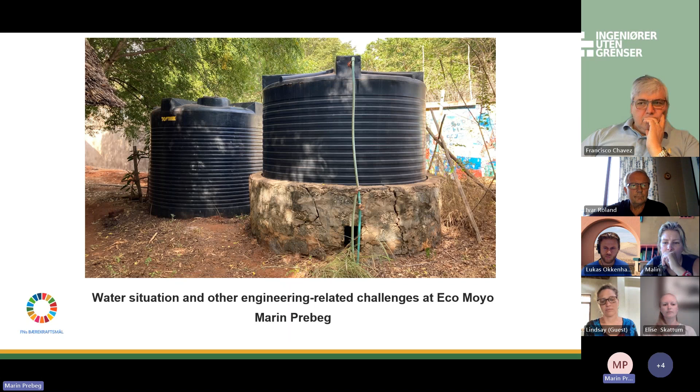Thank you, and thank you for joining the presentation on the water situation and other engineering-related challenges at Eco Moyo. For those who have not met me, my name is Marin Prebeg, and I have been involved with Engineers Without Borders for about 2 years now. The latest thing I did with Engineers Without Borders was a visit to Kenya in February this year, where I did the work I'm going to present now. The brief presentation will revolve around some background about what was done and where, since some people have not been at the school and are not familiar with it.

I'm mostly going to talk about the water supply network at the school. We did many other things related to water supply, such as maintenance, water filters, and water demand. We did some work related to solar panels, and had some discussions on rainwater harvesting, erosion, irrigation, and so on. But because of the length of the presentation and its scope, we will mostly focus on the water supply and leave the rest for discussion afterwards. I'm also going to say something about the engineering committee, one of the main outcomes of the visit, and we'll close with some brief conclusions.

So, brief background to start with. Where in Kenya is the school? It's close to the coast, 2 hours north of Mombasa, for those who are not familiar with it. And it looks something like this, for those who haven't been there. The school is attended by approximately 250 students every single day, who live in the area around the school. Part of the staff lives at the school quarters itself, while part of the staff comes to the school on a daily basis.

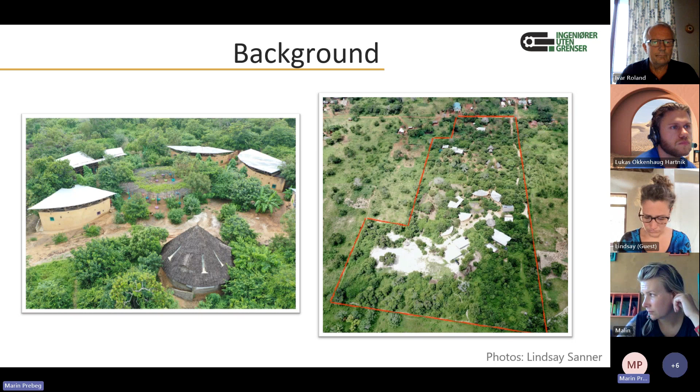The work presented here is presented in more detail in the report we have written for Engineers Without Borders, and it builds on several master's theses written about the school. That's so much for the introduction. Now we move to the water supply. If there are some questions along the way, if something is very confusing, I don't mind getting questions, but we can also take it all afterwards.

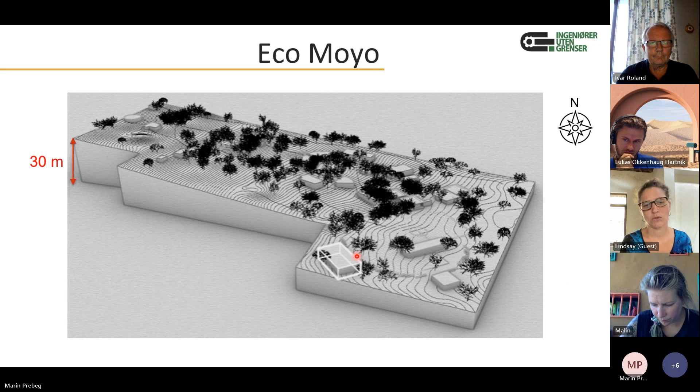That said, we actually move to the water supply network. The water supply network at the school consists of 15 tanks. 8 of those tanks are rainwater tanks, meaning they are filled only by rainwater and are not connected to the rest of the network. These 8 water tanks are approximately located at the following locations. Those familiar with the school might recognize that this is the director's house, these are classrooms, and so on. For those not familiar with it, it's not critical for the points we want to bring out. So we have 8 rainwater tanks with a storage capacity of a little over 40 cubic meters, and 2 tanks which receive municipal water with a total capacity of 20 cubic meters. This is the only water coming to the school from outside the rain falling on the property, so this is, as of now, our only connection to the municipal water system.

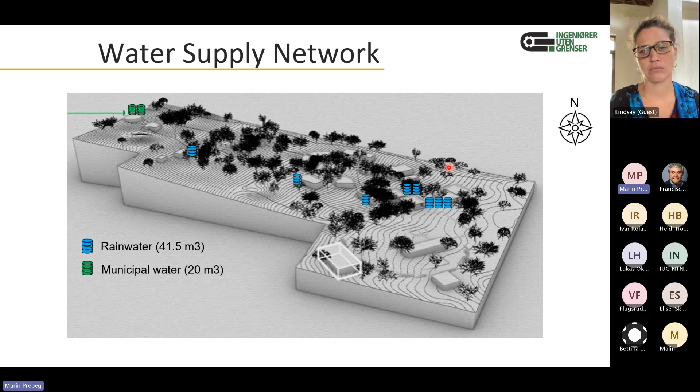In addition to this, we have 5 water tanks which are connected to these 2 municipal water supply tanks. The blue tanks are rainwater only, standalone, with their own tap, and water can be retrieved locally. We have 2 municipal tanks filled with water from the municipality. And we have 5 yellow tanks which are filled with both rainwater from the nearby buildings, and they are connected to these 2 tanks at the top with a system of pipes going around the property, which is not shown here, but you are going to have a look at it.

Let me see if I'm missing something here. Sorry for the quick delay. I don't think I'm missing anything. So that is that for now.

Another 2 figures we have just from the report: you can see the size of each individual tank on the left side, which we did not show on the presentation. And you can see a full water supply network of the school, including the taps. I have not shown water taps in the previous image, not to clutter it too much, and because it is not critical for what we would actually like to discuss here most.

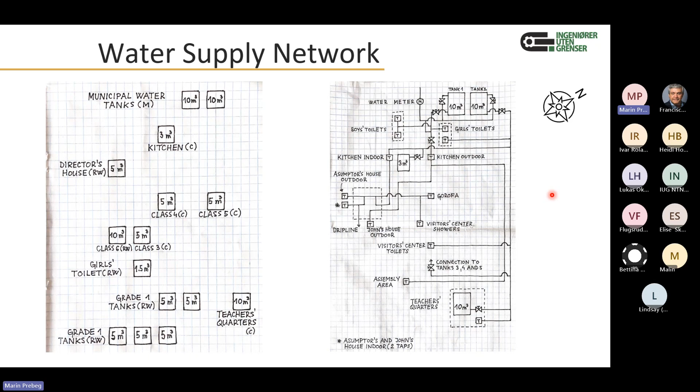What we would like to discuss are 3 to 4 main questions that were left unresolved during my stay at the school, or I did not learn the answer to those questions. I think they are all important for the future development of the water supply at the school.

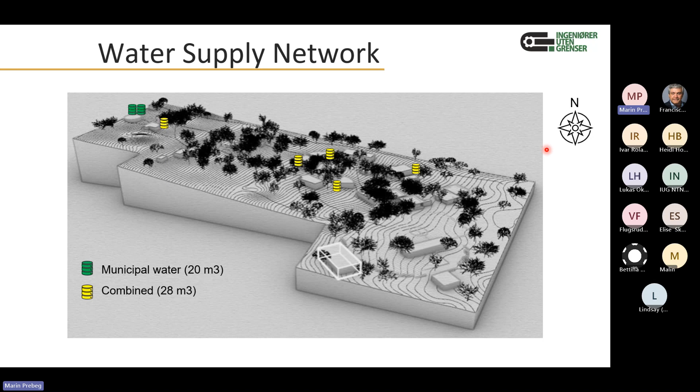So we are going to go back to this slide, and we are going to drop the rainwater tanks because they're actually not connected to the supply. We are going to focus only on the 2 tanks providing water from the municipality and the 5 tanks connected to those 2 tanks. The next thing we are going to do is use slightly different colors because these 2 water tanks at the top are each supplying their own water supply network. So in practice, it looks something like this.

The rightmost tank, which is closer to the gate for those familiar, is actually supplying with water all 5 tanks connected to the water supply network. That's the one in the kitchen, in the classroom area, and at the teacher's quarters.

The first out of 3 questions which I was not able to find out is, how does exactly the water supply network look around the classroom area? It was left a bit ambiguous in which order the tanks are filled and where exactly the pipes are going. That is something that would be useful to know.

A brief note here is that each of these tanks has a gate valve, so the water does not flow from the top tank into them immediately unless you open the gate valves. So if you open the gate valve here, the water is going to start flowing from this tank into the tank down here, so you can have access to water down here.

Which brings us to the second question. As mentioned, if you open a gate valve here, this tank is going to be emptied and the water is going to flow into this tank. If you open a gate valve here, this tank is going to get emptied and the water is going to start filling these 3 tanks. But according to some people at the school, and according to some of the discussions we had with people at the school, if you open a gate valve here, the water from the first tank is also going to flow into this tank or into this tank.

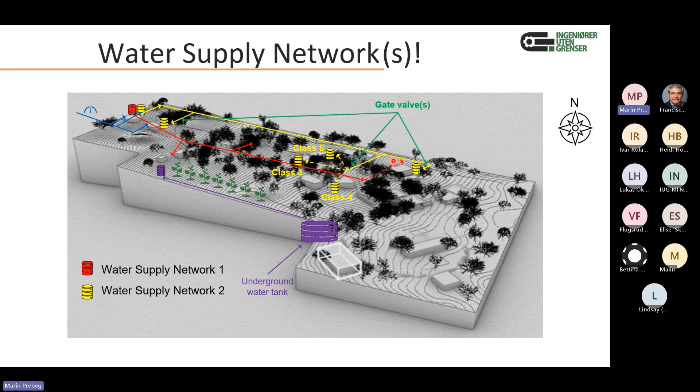So while we stayed at the school, we often felt that we lacked information about what was done, when it was done, and by whom it was done. One example is the layout of the pipes and the water supply system. The work has been done over the years and has not necessarily been recorded.

So one of the things I proposed is to establish an engineering committee, which was done. Part of it are Dominic and Gregory, who are unfortunately not here, and also Kazungu, Gardiner, and Malimu, who is the caretaker.

So the idea is to keep it as a record of what has been happening at the school, both so as not to forget it, and also if there is a change of people working and living at the school, so that you have some kind of track record of what was happening before they came to the school.

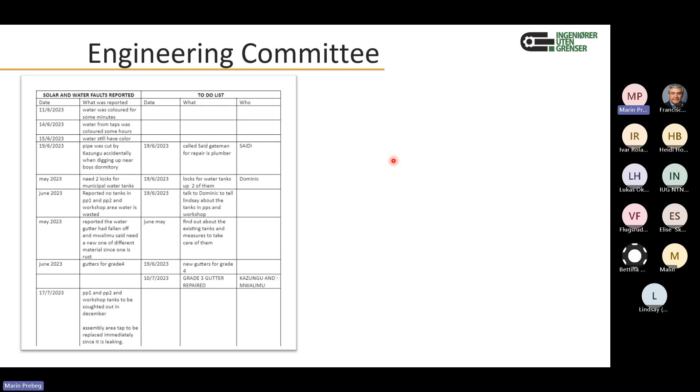And as part of that document, we are also taking measurements of the water meter on a weekly basis, in an attempt to better establish how much water is being used by the school and how much water is being delivered by the municipality.

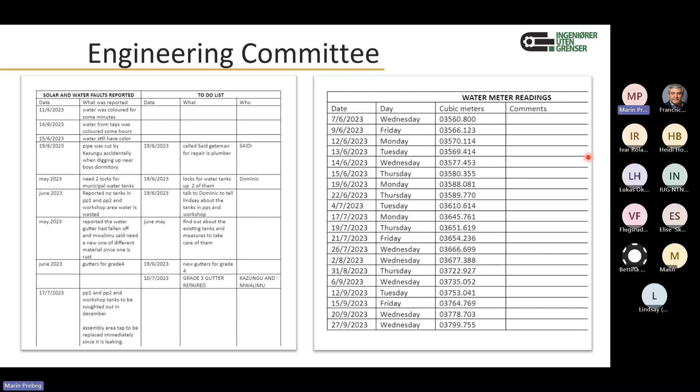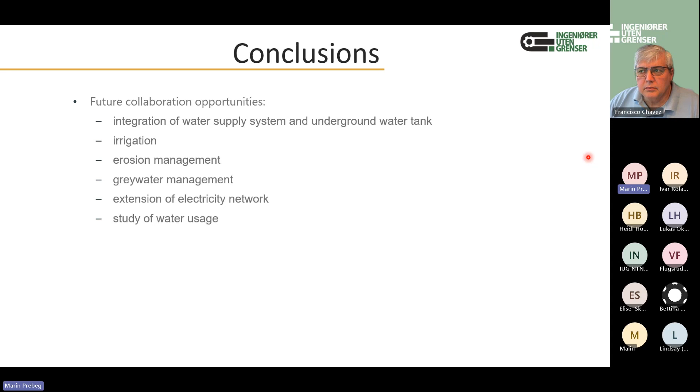And with that being said, thank you for your attention, and also thanks to those present who enabled me to visit the school. So that brings us to the last slide.

Thank you very much, Marin. It was a fantastic job, and I will assume that Lindsay, Malin, and the rest of the team over there will get a lot of benefit out of this, and of course it's good that you've set the path for continuing with it.

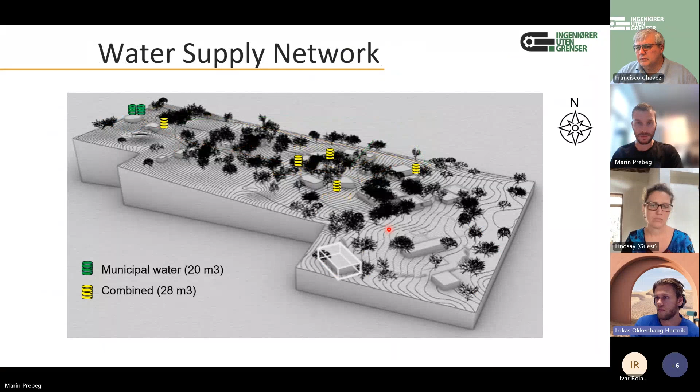And if you go back, could you show the presentation, Marin? Yes, I can do that. And if you show the plot with all the water connections, the whole water system. No, the other one, which is the potential, with the new one or the water tank. This one. Yeah. I think because of what already exists, I don't know what we're going to do about that, but I think we also have some important questions to answer for building the new system or increasing the system.

If the desalination system where you use a well actually works, you may not actually need a water tank, because when you have a well, you usually have a quite stable flow of water income. I think it's important to set a proper strategy before we start building something. I don't know what you call it, but in Norwegian it's called a mulighetsstudie. Feasibility study. Yeah, feasibility study.

I think it's important to see what kind of options we have, how the market is, how much things cost, and what is better for Eco Moyo. It's kind of difficult to predict what's going to be there or how much prices will change in 10 years. But I think as for now, at least when Lindsay and Eco Moyo start fundraising, that we have a plan for what kind of system we should design or implement at the plot.

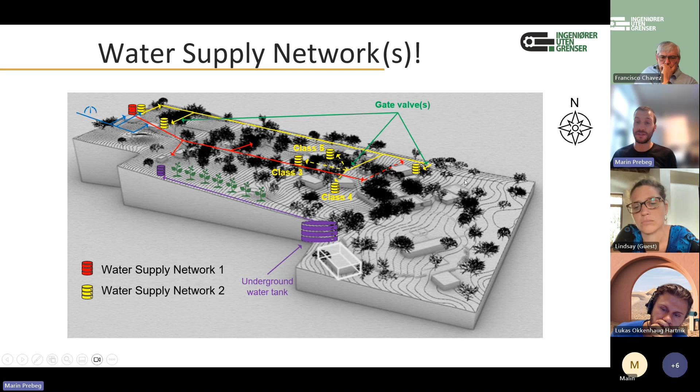But how often is this the case, that the municipality is sending water but it's just not pressurized enough to flow into the tanks? I'm not 100% sure, but it's something we might have observed while being there - we were told the water was flowing to our neighbors upstream of us, so they were getting water, but by the time it came to the school, we could hear it in the pipes, but it was not flowing into the tanks. If that makes sense, hopefully it does.

I have no doubt it should be possible to completely map the whole network of pipes down there, but one important factor is to be able to make tests. And I understood that Marin, Lukas, and the rest of the team were a bit limited because of the conditions when they were down there. So we can look into that possibility again later, discuss it, brainstorm it, and see how you guys can finish mapping these other areas that are still a bit uncertain.

Any other questions or comments? Anybody? The last one, hold on. I think there is something in the chat here.

Yeah, okay, Lisa has to go. Thanks for a very nice presentation and discussion.

Okay, anybody? Wow, Gregory is here. Hello, Gregory. Hello, yeah, nice to meet you.